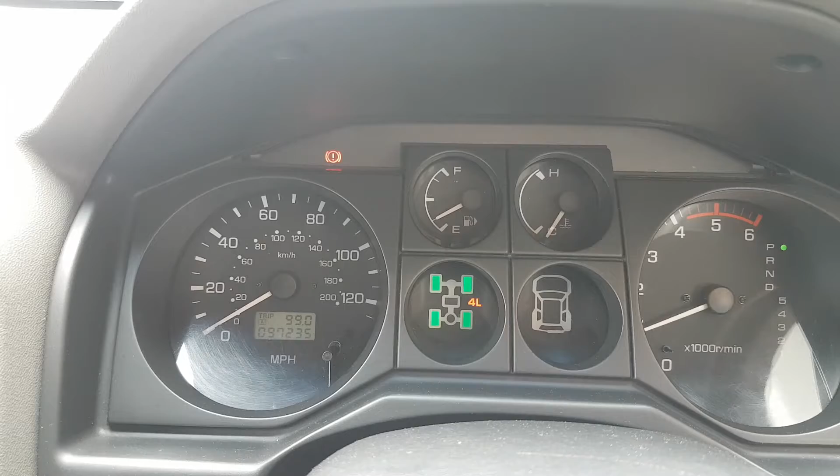I'm not sure, we're going to start the car now. So there's no lights, or at least no lights because they've been covered. Those lights at the front, those wheels, are flashing - I believe it's because they're not engaged, obviously we're in rear wheels only. So that's fine, but look what happens as soon as I try to change this.

It flashes like that, and then everything goes off. At this moment in time, we should have the 4 tires, the 4 wheels, showing green as far as I'm aware. And if I come back now to rear wheel drive, nothing happens, as you've seen. So it faulted straight away. And if I try any other position, nothing works.

Okay, so I think if I restart now, let me see what it does. If I restart, let me see what it does. So that's the checks, obviously. Okay, so rear wheels only. Let's move to 4-wheel, 4H, and it does that. Okay, so this is the problem.

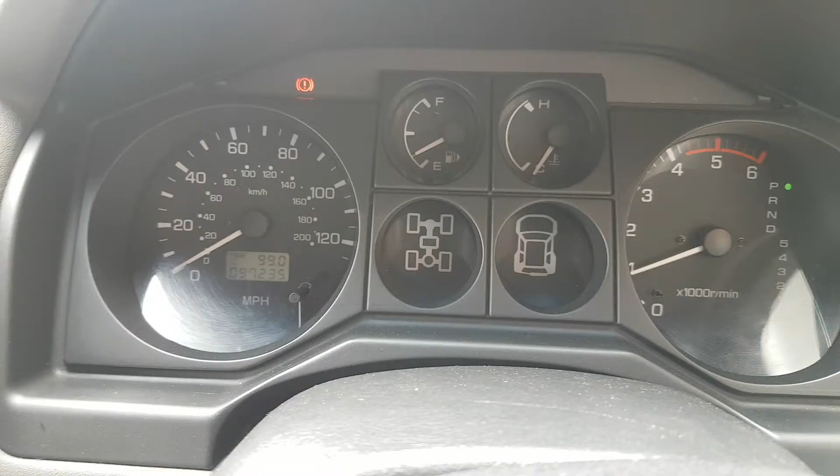Someone scanned this car before. Don't know if it was the same person that covered those lights. Either way, we're gonna scan the car and see what we can find out.

So this car has the OBD16 and that Mitsubishi 14 pin connector, whatever that is. I'm only connected up to 2005, so I'm only connected to the OBD16, so I don't know exactly what I'm gonna be able to do.

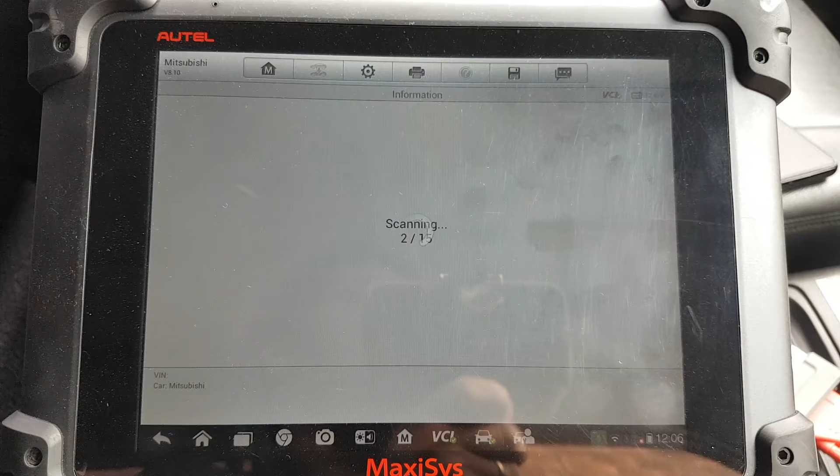To start with, let's go to the ABS, see if the ABS light goes off. As you've seen, the light behind for the ESP is actually covered up along with the other light. Let's see if it connects.

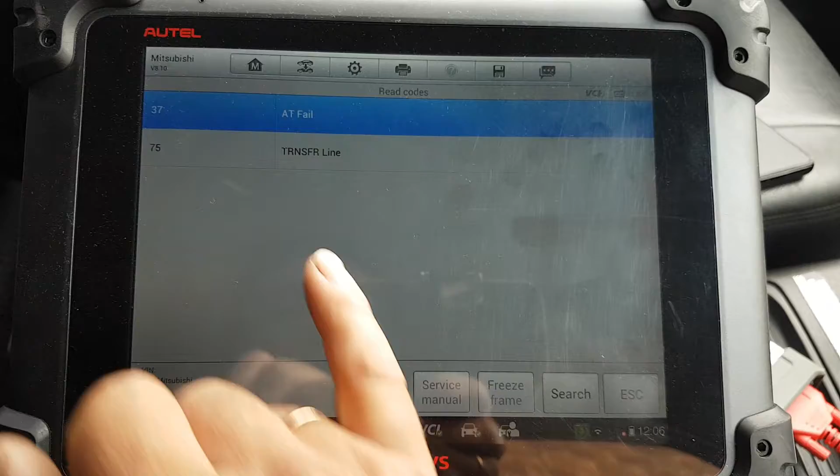Okay, so read codes. Don't know if this is the same module as for the ESP. Should be. So transfer line AT fail, automatic transmission. I believe this is going to be all related, to be honest, and most likely why the ESP light is on, because if the transmission isn't working the way it should, the ESP won't be able to work correctly.

Automatic transmission, but I think we have what is called, let me see if we have any faults on the brakes, HBB. These are quite common to fail. I have a video on that.

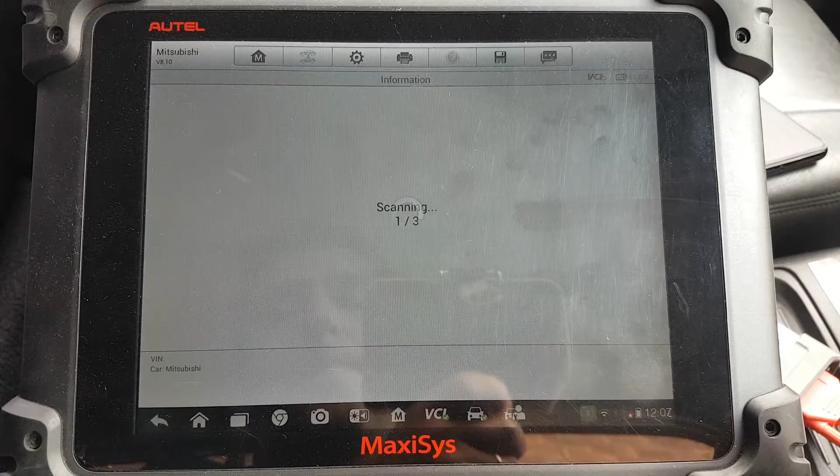Okay, so same faults. Most likely it's actually the same module, to be honest. The ABS or the HBB is going to connect to the same module.

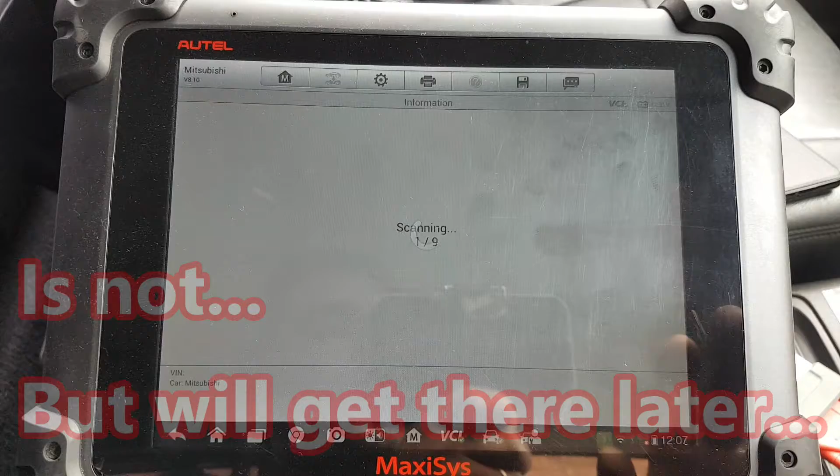So I think it's going to be here. This is my automatic transmission, which hopefully will be the module that controls the 4-wheel drive system as well, or the transfer case. I believe that's where all the engagement for the 4-wheel drive is. It's going to be there. Read codes, and we have what? No fault codes.

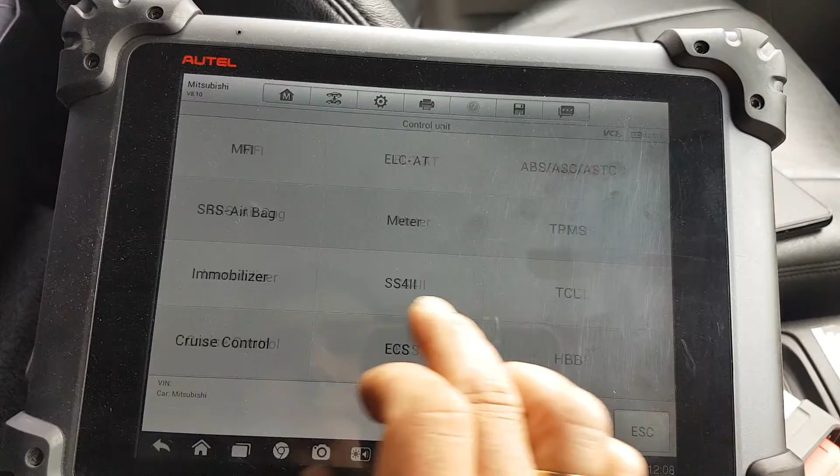Okay. All these acronyms are bloody hell. Display steering angle. Will be TCL, transmission control, maybe.

Yeah, guys, I should have done the research and known exactly where to connect. I do apologize for that, but surely we'll get there. Just hold on. Okay, I got to this module here. I'll show you in a minute. It's SS4II, I think it is.

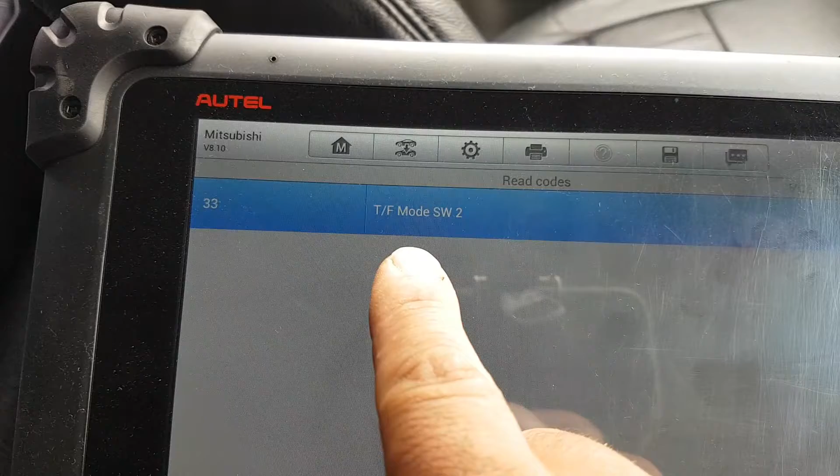TF mode SW2, well that means transfer mode switch 2, maybe? Don't know, I don't have a lot of info. Let me go to live active tests, if there's anything here. So, okay.

Oh, it is actually, look at that. So FW, custom list, 4LL switch, okay, so 2.

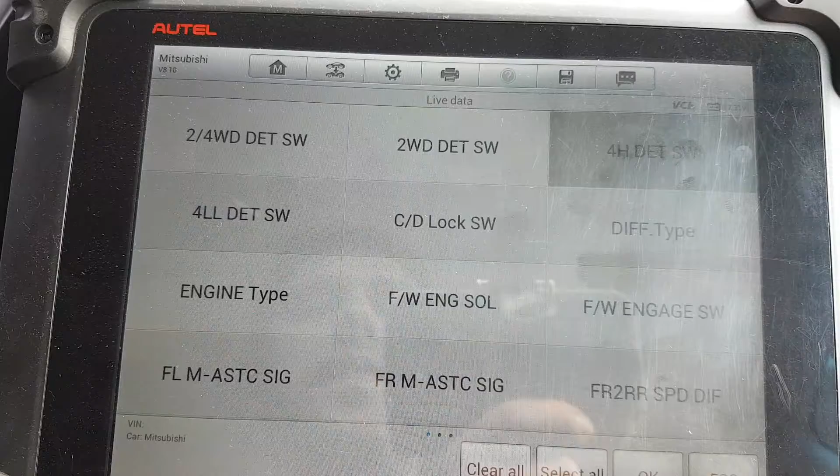That was the one that was failing, so let's do okay. Okay, so on for 2-wheel drive, yeah, that's correct. So if I do test that one...

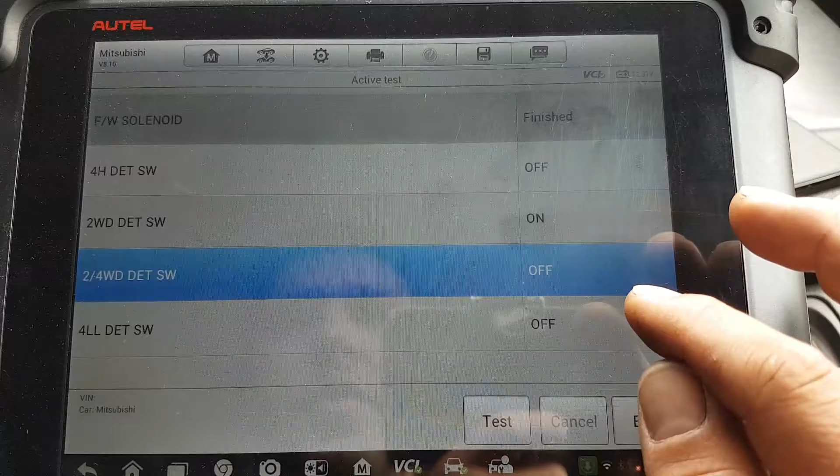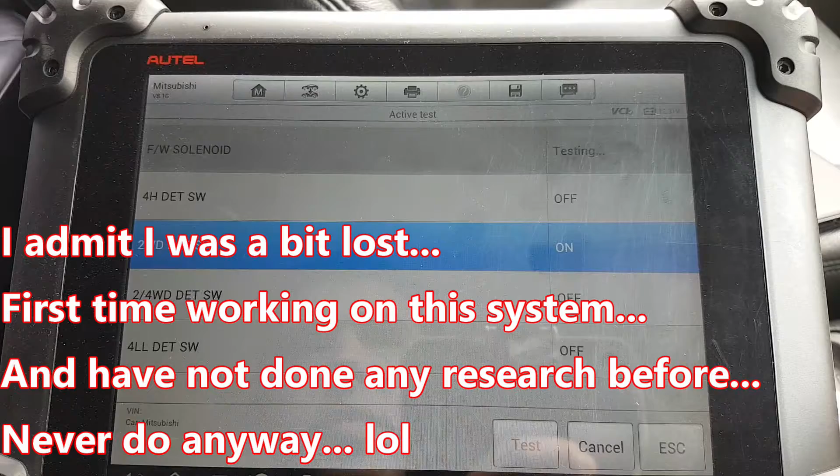I heard some noise in there. Another noise, finished, but that never came on. Let me try the 2 to 4 wheel. What is that supposed to mean then? I can hear noise on every single one. Definitely. Yep, I've heard some noise. Okay, so I can definitely hear some noise on all of them.

Now, shift normal, shift normal. Guys, I don't know what I'm looking at, honestly. But should that 4H come on when I actually switch over?

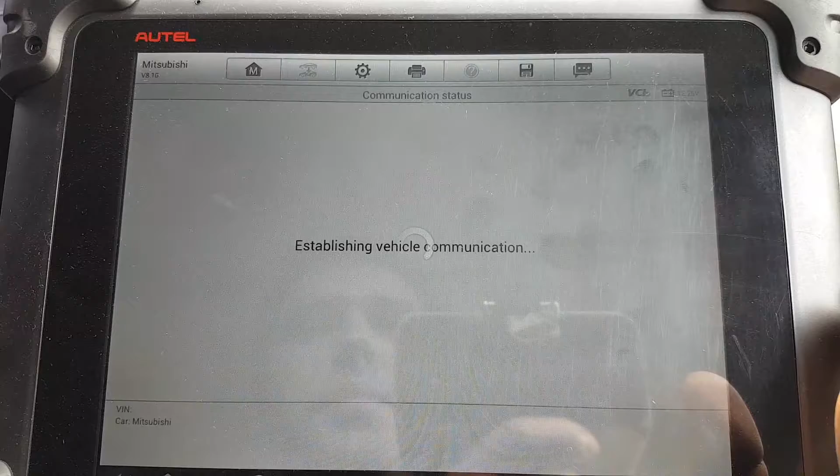Okay, let's start the engine now. Okay, so that's on. So when I go 4H in there, that should come on, and that should stay on or go off, I'm not sure.

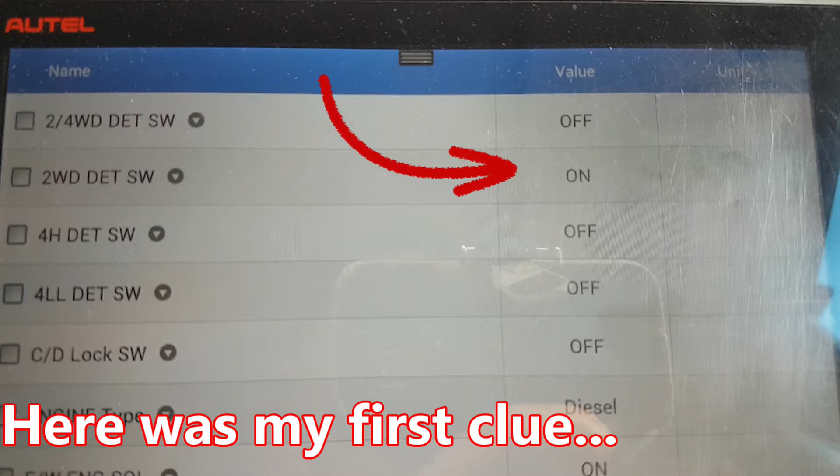Let me go. Okay, nothing changed. Still the same. 4HLC the same. Everything is the same, most likely because there is a fault.

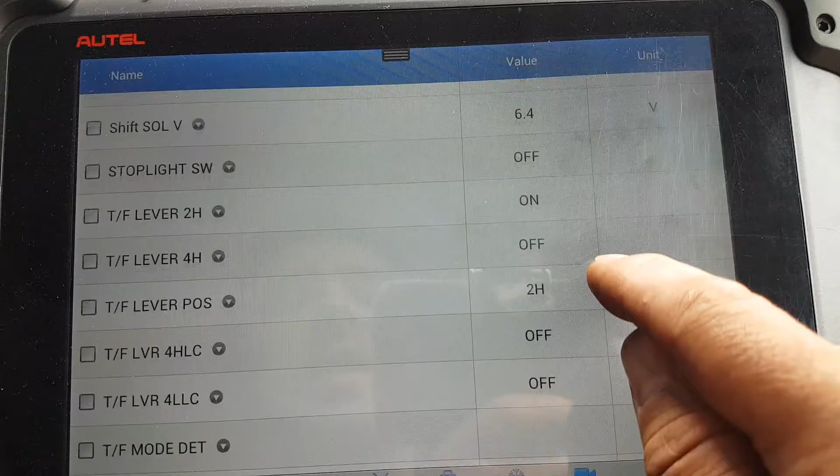Okay. Shift solenoid, lever, okay so this is for the lever position. So let's see if my lever is actually requesting, but I'm sure it is. So it's requesting 2H.

Okay, so on for 2H and lever position 2H. So let's move into the next position. There we go. So all this is working fine here. So the lever is actually requesting the correct positions.

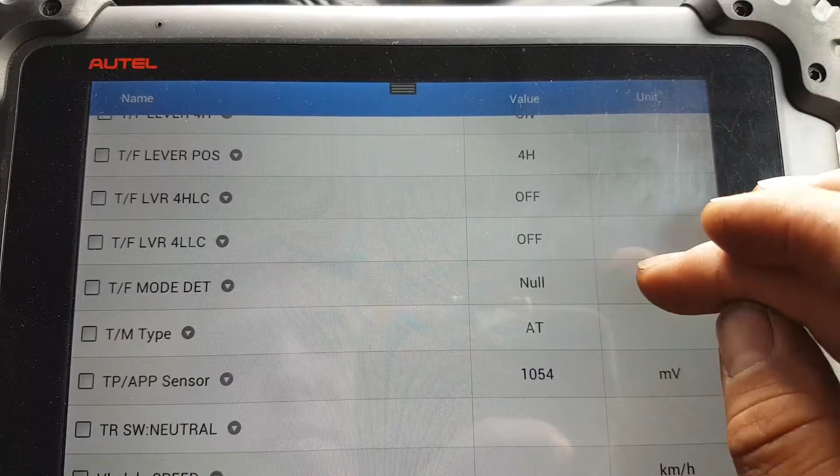Is it actually the gearbox, or I would say the transfer case, whatever, that is actually not switching. Okay.

I think where to start. I don't even know where the solenoids are going to be. Are they going to be inside the transfer case? I don't know. I think the first thing I'm going to do is possibly try to put these on the ramps to lift the Jeep a little bit. It's already quite high, but so I can crawl underneath and just visually inspect to start with. I think that's the first thing we're going to do.

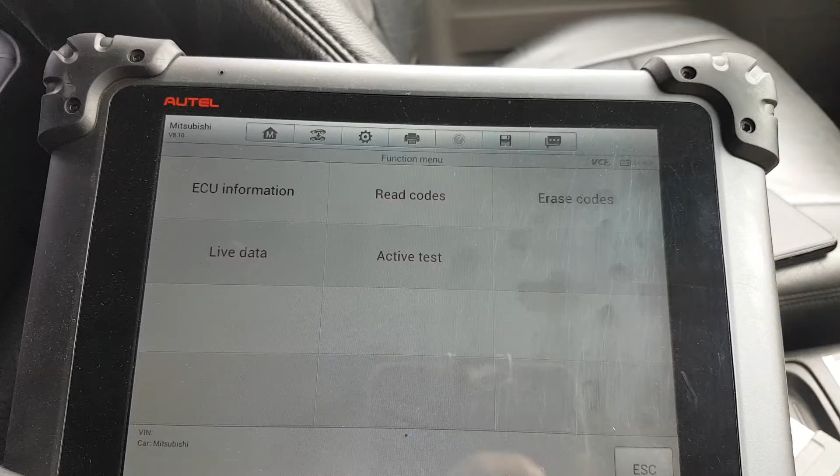You Mitsubishi specialists out there are going to be cringing at me right now if you know exactly where the problem is, or if you know why you're looking through this live data. I think we nailed it for the position there, and I'm pretty sure the other solenoids are going to be the ones that change the gearbox itself. So the request is okay because we've seen on the live data the lever is requesting the right mode. It's just the transfer case or gearbox, I think it's going to be the transfer case, that is actually not switching.

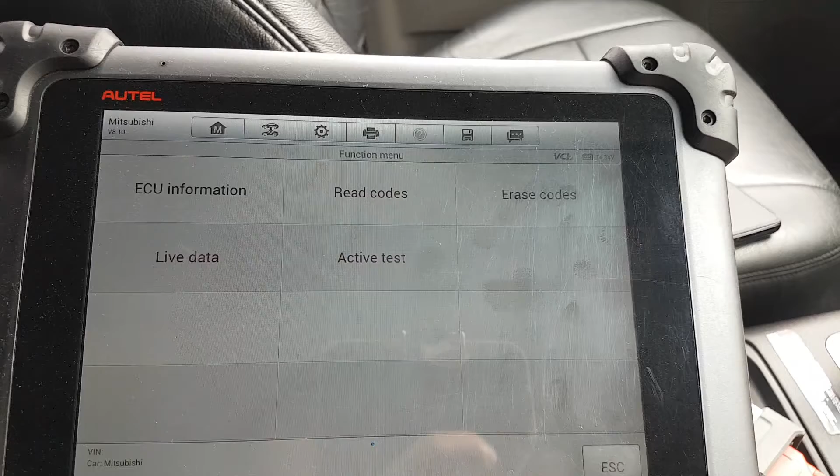So let's try to get under the car and see what we can find out in there. Okay, got it slightly on the ramps. It should be more than enough for us to crawl underneath and see how this works.

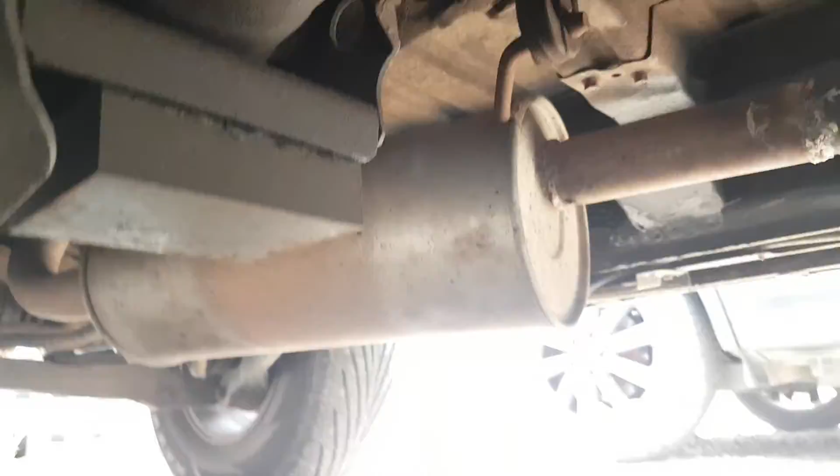Okay, so engine, gearbox, oh voila, transfer case, just as I suspected. So this should come from gearbox, transfer case, to a rear shaft, and then from here we should have the shaft that goes to the front. There we go, there we go.

Oh, straight away. Have I just found it? Look at that. I just got the jackpot. Oh dear, it would be great if this is my problem.

Right. Guys, once again the importance of visual inspection. Look at this, oh dear, spot on. It's actually split completely.

Wow, did I just get the jackpot? Oh dear, look, it has a brand new cut, whatever that is. How could someone not see this?

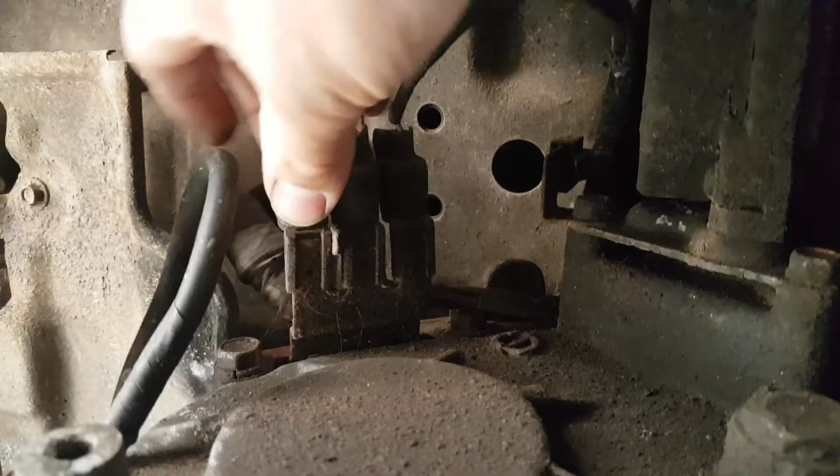Right, I don't think I'm gonna have to take you through too much on this. Let's... oh crap. It's actually cleaned here. We're gonna have to connect these again, check all the other ones. 1, 2, 3. 1, 2, 3.

Will this be what changed my... Oh, it would be lovely if it is, wouldn't it? Okay, I'm quite happy right now. Don't know why, but I am. So let's fix this and see what happens.

And just before we do, I want to show you. I think I know what happens, because look at that one in there as well, a little bit of damage. Can you see there? Possibly not. This is because the outer insulation has been touching there, and it's probably what slowly went through the insulation. This one seems okay, so I think I'm gonna have to repair these two, or at least inspect this one and see if it's still good, and maybe just insulate these or whatever.

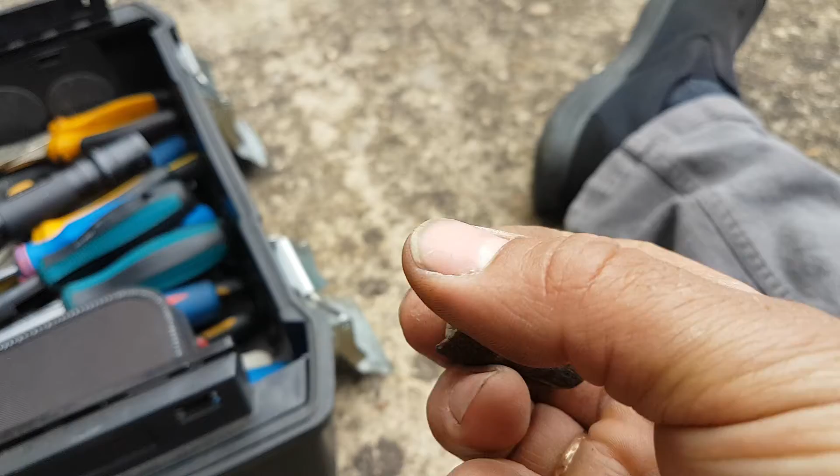Okay, let me fix this and go from there. Okay guys, the chip is there, so because the wire is broken right after the plug, what I'm gonna try to do is dismantle the plug, pull the pin out, and get another wire here which will connect to the other one. So a slightly longer wire, because I won't be able to do anything with this where it's broken. That's the way I'm gonna do it.

And now let's solder this to the loom, and most likely repair the other one as well, and see how it goes. Okay, so this one here is done, ready to put the tube shrinker in place. Just slide it in and heat it up. I'm gonna have to do this one too, because it has already gone through, so the wires inside are gonna start to corrode. Even if I insulate this, I'm not gonna trust it, so we're gonna do the same on this one. This one is the only one, as I said, that is still good, but we'll do the same on this one, and then I'll show you the final result. And there it is, all done.

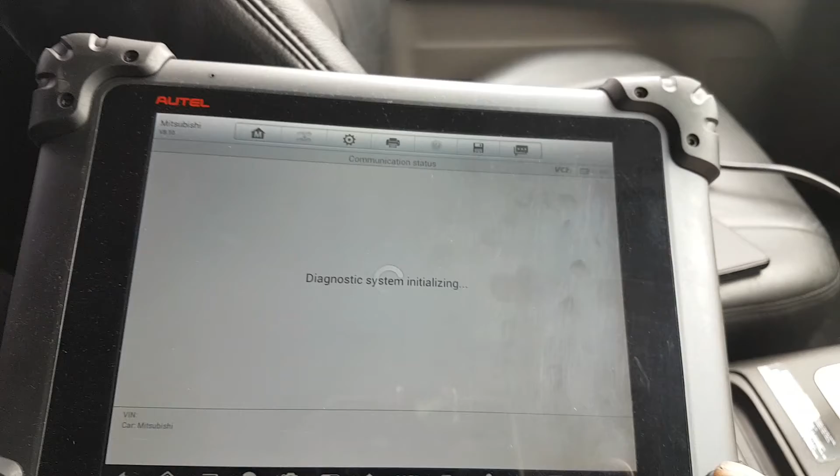Okay, now let's go inside the car and see what we have. The first thing we're going to do is turn the ignition on, and do a full scan. I'm going to do an auto scan and clear any codes. I think that's the most sensible thing to do right now. So we'll do a full scan, let it scan everything, then clear all the codes and go from there.

Okay, scan is finished, found a few faults. We're gonna clear everything and then see if there's anything that comes back.

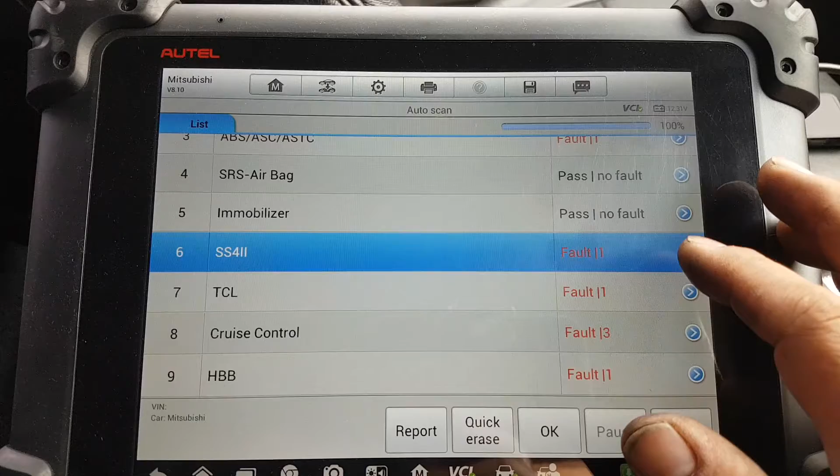After the full erasing, we still have a few faults. On my ABS, for example, I still have some. I've searched what those lights were for. The first one on the left is the ESP fault light, the other is ESP off—if I disable the ESP with that button, that light should come on. The other one just indicates a fault.

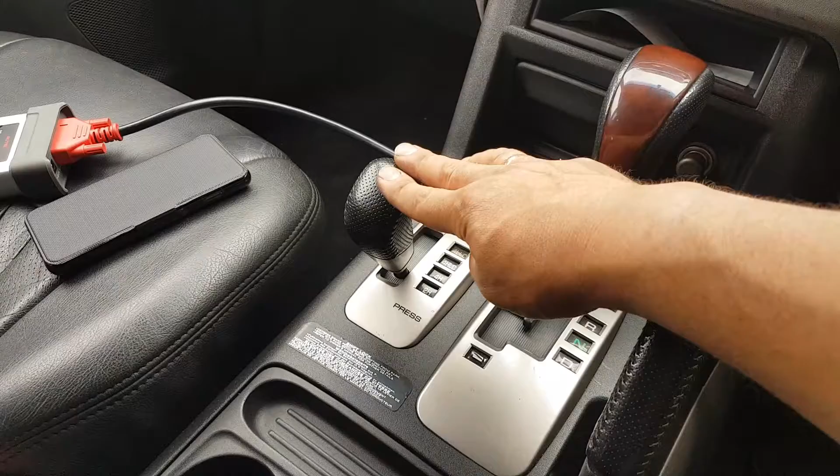So what I want to do now is go quickly through the live data again on the gearbox, which is down in there. I have to wait for the reading codes.

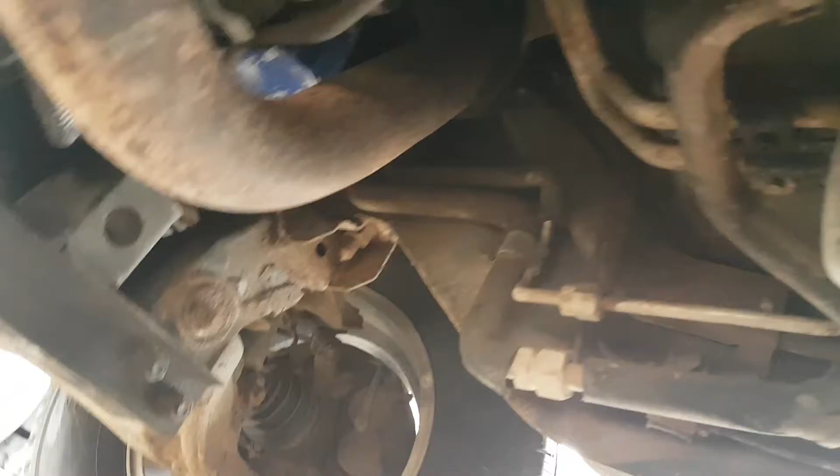As I was checking underneath again—where did I put the torch—I found another issue. I don't know if it's related, but as usual, the cars I get have been worked on by bloody idiots. I wanted to look at this.

Okay, so if you look there, see there? Keep an eye on that right here. Look, it's disconnected. The loom is not in its place, etc. Bloody hell. I don't know if I'm going to find anything else.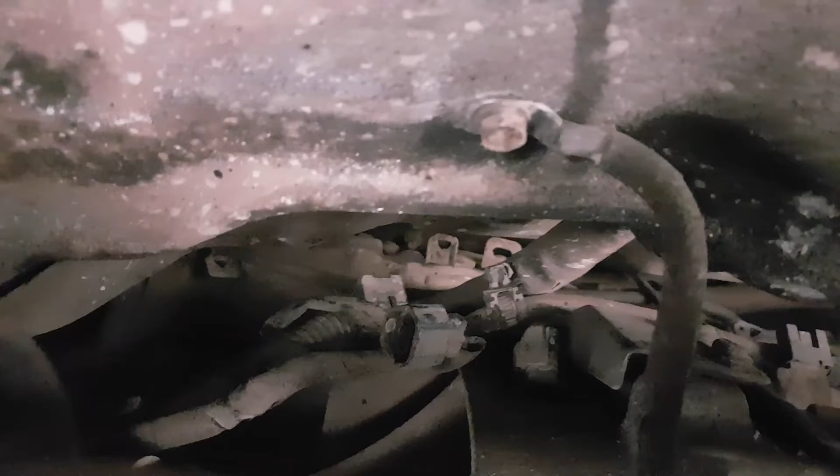So let's plug all this back in, put everything back on properly, and see if this was my issue. It's not 100% in place—there's two brackets I can't get in place, there's really no room, but I'll try later with some screwdrivers. For now, everything's plugged in, let's see what happens.

Okay. Oh dear, that was bad. Okay, I might need to... Still no good. Let me see what faults we have now.

Bloody hell, looking at that it won't surprise me if other wires have been damaged, or something's still unplugged at the back. I just don't know. Let's scan these again and see what we have now.

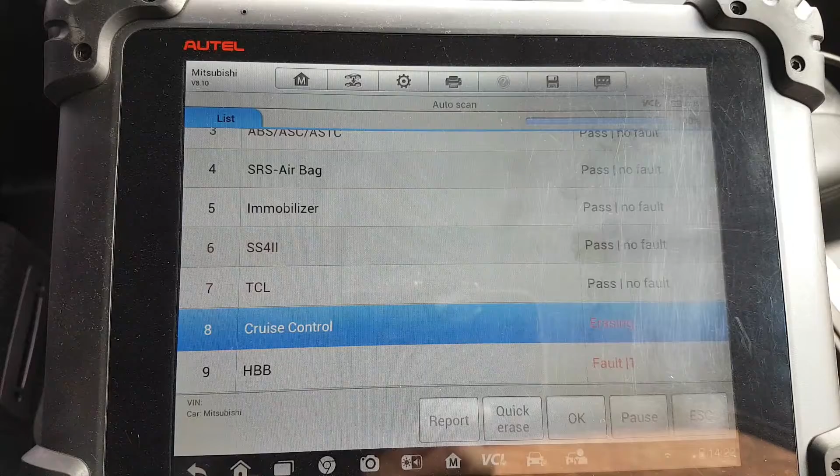So far it's looking good. I read the entire car, cleared all the faults again, and at the moment every single module is coming out with no faults. By the way, most of the faults on this cruise control—there we go, spoke too soon. But as I was saying, most of the faults on all these modules were the same: the 75 transfer line and the 80C fault. At the moment everything is gone. I have my lights there now, so I think I'm going to turn the ignition off.

Now we just have an issue with the cruise control. Okay, let's start it and see what we get now. Strange enough, there's nothing coming out in there—I was under the impression it should bring up two lights. Let's try engaging like that.

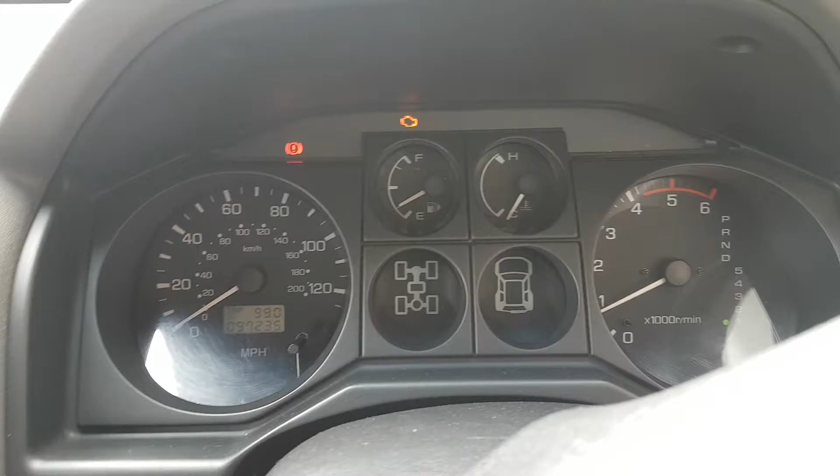Okay. Oops, so it's still something not right.

So what was that sensor at the top then, whatever that was. It should be in two-wheel drive right now, and it's not coming up. So let's rescan the car and see if we have any faults.

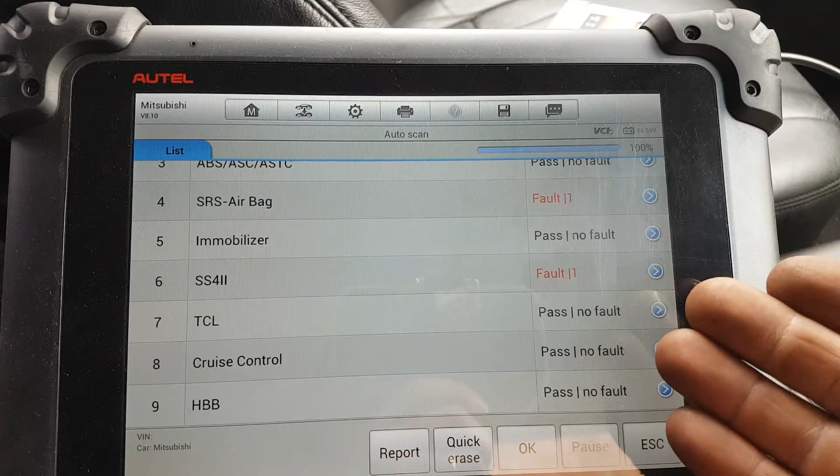It's really weird because I've not even deleted the faults—I just went back. As you've seen, there were faults for the cruise control. I got out, auto-scanned the car again, and now there's no fault for that, but I have these faults here: airbag—I don't know why we have an airbag fault if I have no airbag light, I don't even know if the airbag light is working, I think it is. We're left with one fault on the MFI, which I believe is the engine, and one on this SS4II, which I believe is the transfer case. Let's scan this and see what we have here now.

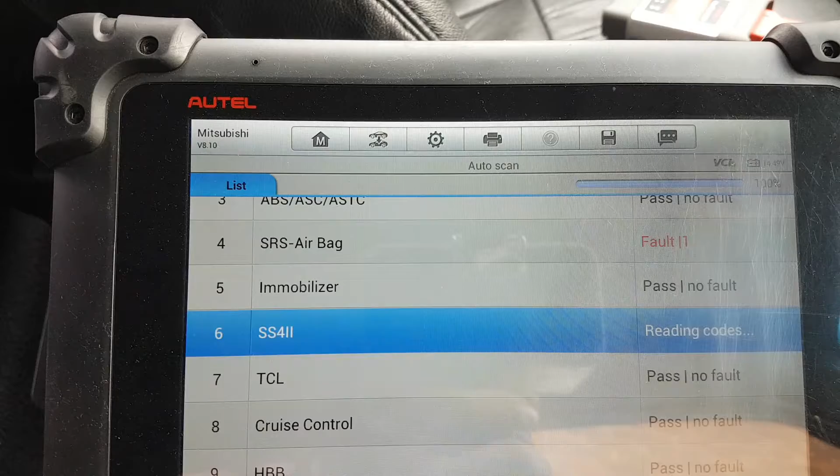Do we still have that? No—TF mode switch 2. So we don't have that transfer line fault anymore. Probably that's why it was: got switch 2, transfer case switch 2. Let me go finish that. TF switch 2, okay.

Let's go just see what we have on the engine. Seriously, all the cables, all the loom is not routed properly, everything is a mess, unplugged as you've seen, broken wires. Oh gosh.

On the engine we have EGR Position Sensor—it's a completely different thing now. What the heck's going on here? Okay, so I think I found the issue this time, well, another issue I'd say. Right here at the back, there is a sensor which I believe is the sensor.

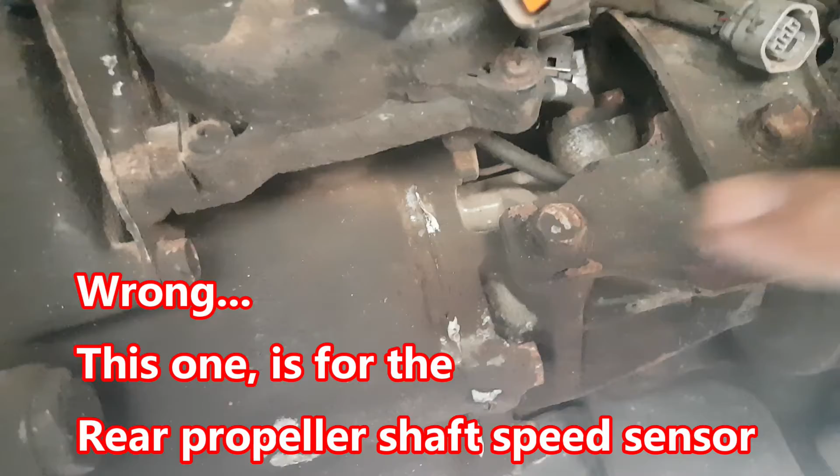Now, this is the plug for it. You can see it's been a little bit battered in there. But the worst is, I removed the sensor, and the sensor is actually broken. Not the sensor, but this bit here, where the plug holds.

Let me see how I'm going to do this. Now, when I plug this in, like that.

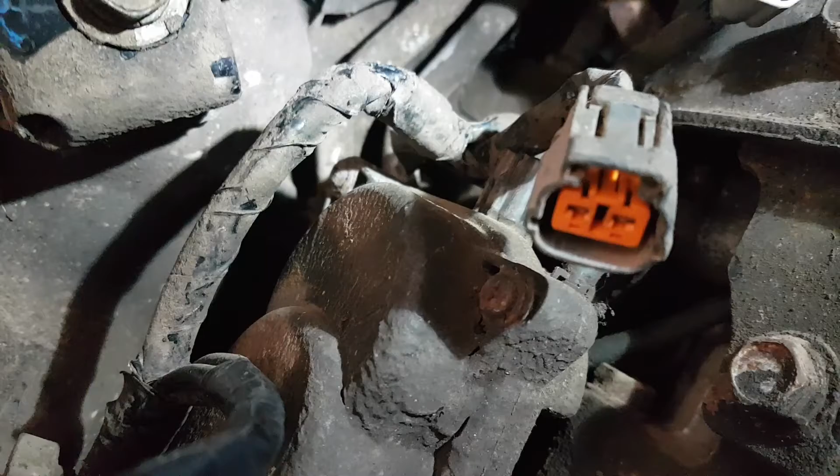Okay, and I do apologize because I had to take a 3-hour break. I've been helping a friend who came around to change some suspension arms on an Audi A7, 2013 I think. It's the one with the bushes on the chassis side, filled with oil, and one was ripped and lost all the oil.

Anyway, as I was trying to show you earlier, this is broken as I've shown you. So if I push this back in there, when I take my hand off, can you see it coming back? And obviously with vibrations etc, it just comes out quite easily. So I think this is one of the issues as well. It's failing here, so unless I get a new sensor, I'm not sure how I'm going to hold this in place.

Let me think. I don't even know where I stopped last time. Just late nights, I'm a little bit tired, but I really want to get this done.

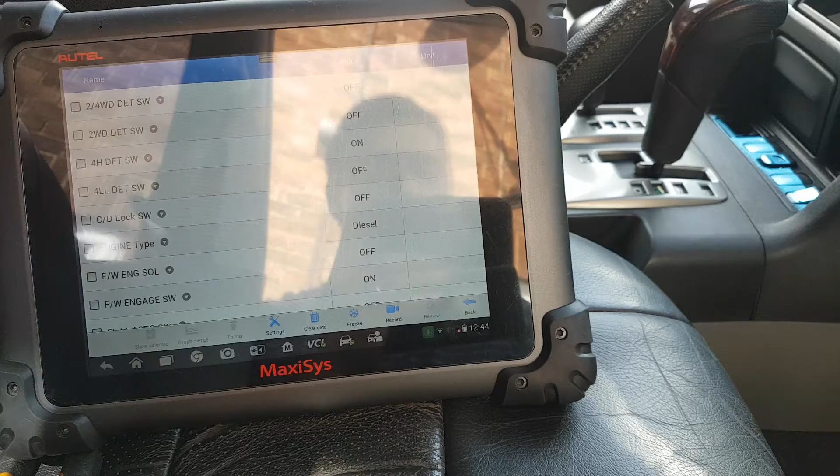So the more I dig into this, oh dear, there's hoses disconnected in there that look like breather hoses, and oh my god, who's been working on this Jeep? I don't even... anyway, I think I mentioned earlier, and I just literally finished managing to get the gearbox.

Let me actually jump in. I managed to get the gearbox all the way to 4LLC, and it worked fine from the 2 all the way forward. Now on the way back, it failed.

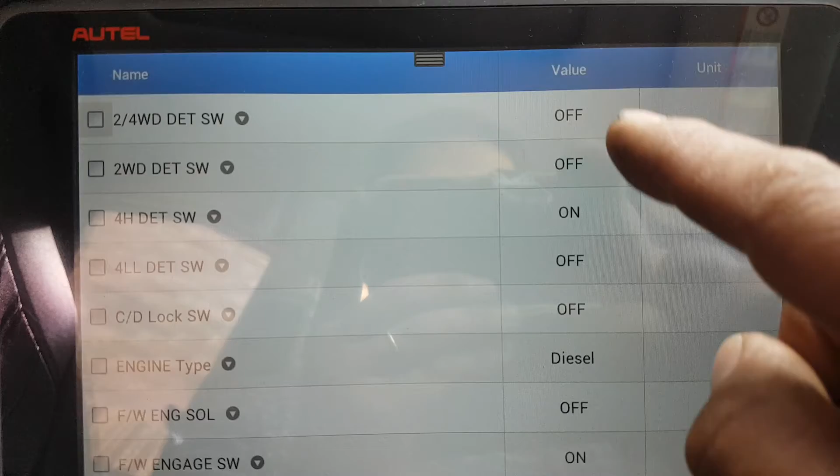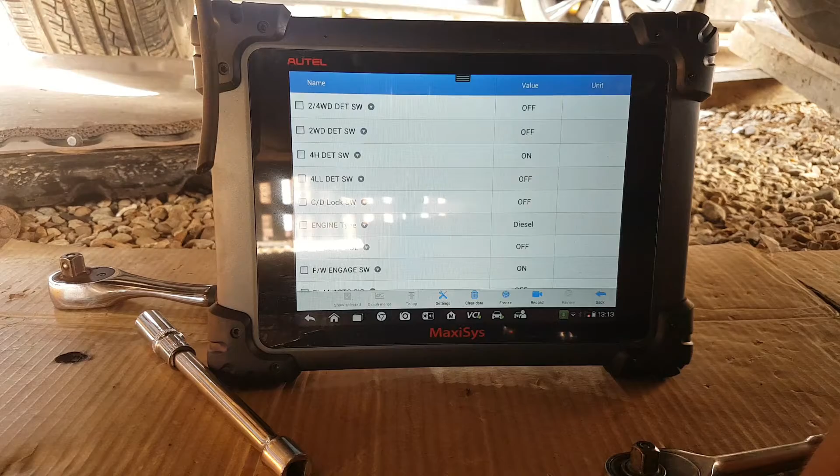And that's exactly what we're going to look at, so I'm going to pull this switch off and have a look at them. Okay, and I think I nailed the problem. Right, let me show you this. So right now the sensor that goes to the 2W/4W detector switch is disconnected. The switch has been removed, it's here in my hand.

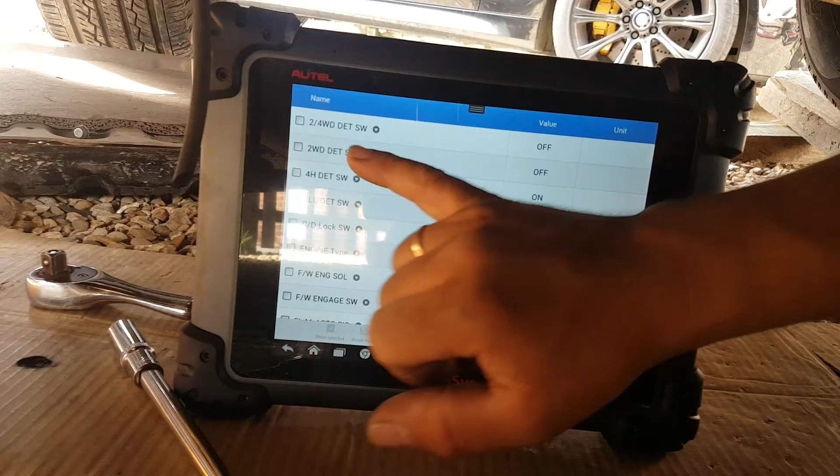What I want to show you is the way this sensor works: it's grounded through the body itself from the sensor, and when it activates it just grounds this signal wire. So what I wanted to look at is the 2W, the 2 and 4W detecting switch. I have my test probe here connected to ground, and I'm just going to ground the plug that goes inside the car, into the module. Let me put the camera first so you can see it.

So I'm going to ground it, and you're going to see it go to on. Oh, come on... there, you can see that goes to on. Now if I take the ground off, it goes off. Now if I put it on, it goes on. It's a little bit slow, but... off. Okay, so you can see the integrity from here to upstairs, up to the module, is okay.

Now look what happens when I connect the sensor. Let me connect this sensor back in and I will show you. Sensor is connected, and let me ground the sensor with the test light.

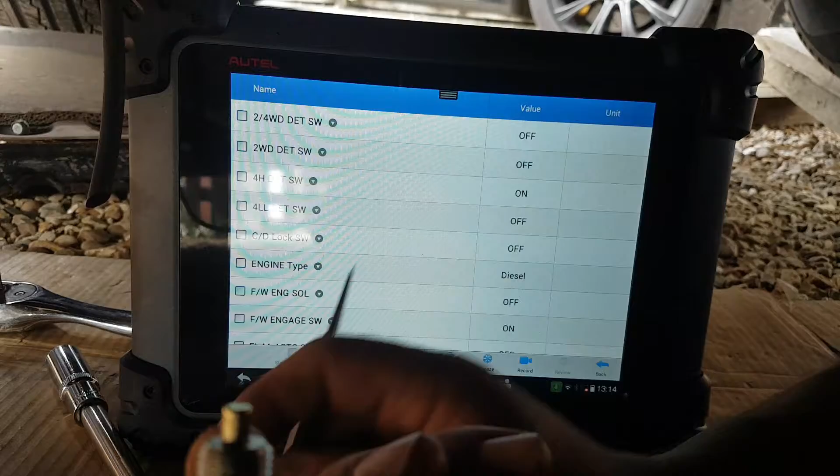Right now it should be showing on, okay, and it's showing off. Right now it should be showing on. So let me see... there we go, you see that? You seen what happened? Now if I push it, it goes off.

Now look what happens if I release it slowly. Let me see if it does it again. Now it worked okay - I've been trying this a couple times, and I think I just managed to get the sensor sort of working. There we go, look at that. You see, I've released the sensor and it's showing off, when it should be showing on right now.

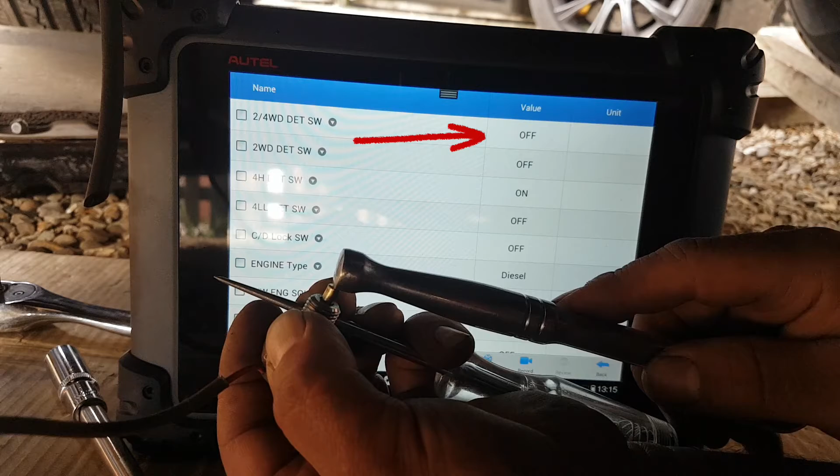So this is my problem. If I do this again, you see, I've just touched it. Look, off, you see? Now let me press again. Off. Off.

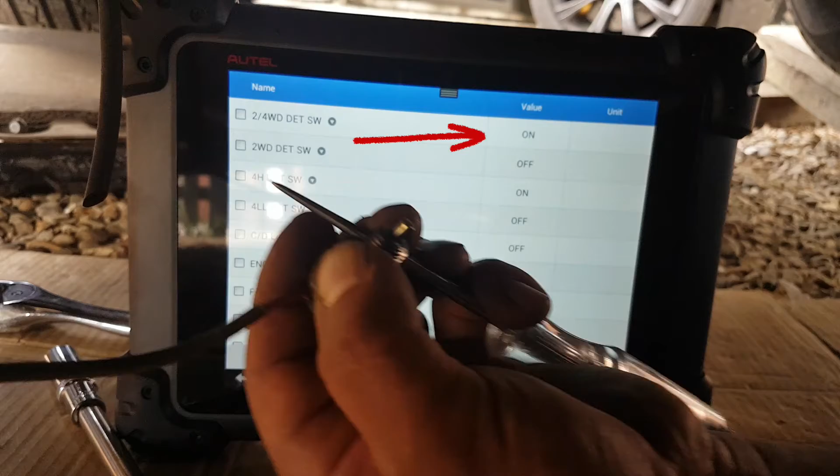You see, that's my problem. This switch here is causing everything. Now I don't know how the other ones are, if they're all good, or if there's another one possibly doing the same thing.

Let me just check and make sure it's not the wire coming to the sensor. I don't think it is. The wire is good, once it's on all the time.

Now if I press it slowly again, or just press a couple of times, sometimes it fails. There we go, failed again. You see?

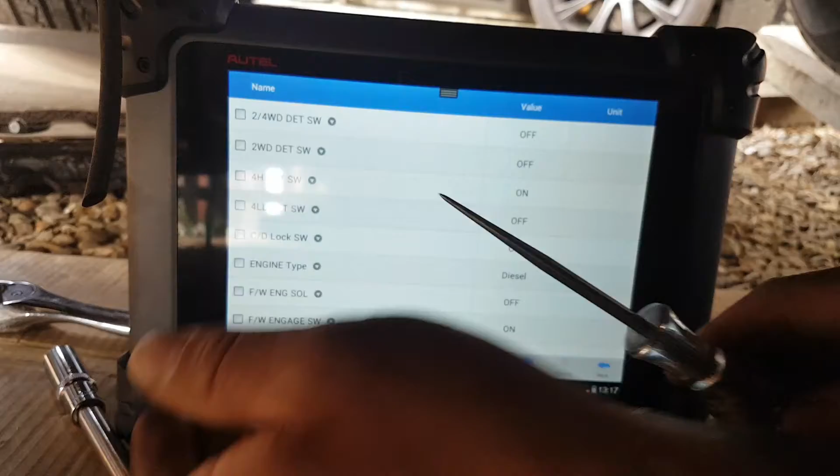Right, there's a few more sensors on this, or switches I would say, five of them in there I think. I'm just gonna, I know we just have a code for one, but I might be keen to replace them all while we're here, while we're through all this hassle - just get them all changed. Probably the best call, I think.

But guys, it took me a little bit to get to this. Now let me show you how I got to this, kind of. Oh dear. Come on, seriously, hold on a second.

Because initially I was thinking it would be the actuator not moving properly, but it's not. Something else. Ah, there we go.

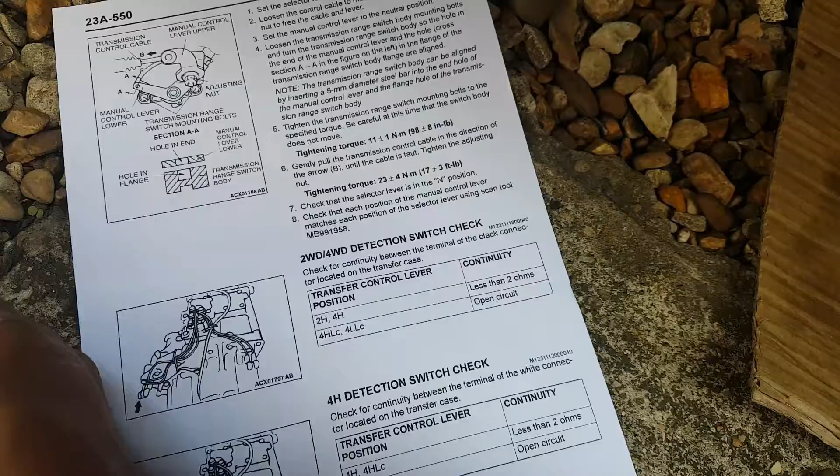It even tells you here how to check this, but which one is this one here? So there we go - in 2H or 4H it should be less than 2 ohms, which is that sensor there, the last one on those three, which is the black one. I think it even says black connector in there. So less than 2 ohms, which means it should be a closed circuit when you go to H.

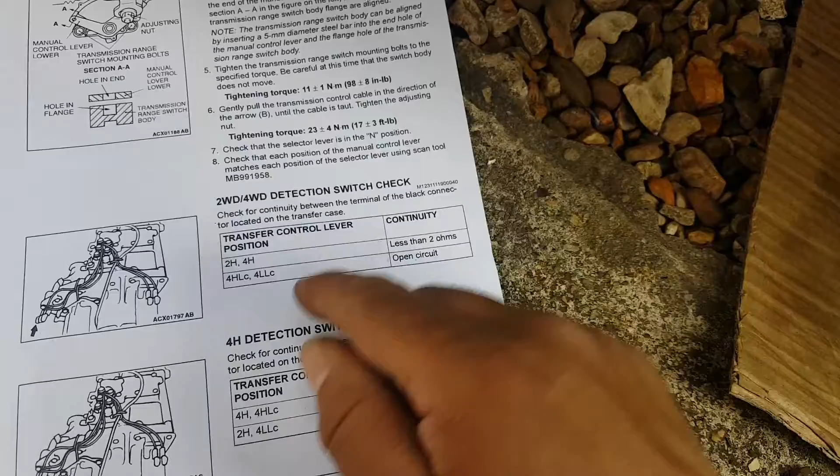And you've seen I brought the gearbox back to 2H, and the gearbox stayed on - it stayed as that switch didn't close the circuit. So yeah, that's my problem. Let's go get some switches and go from there.

Okay, and just bought 5. Now let's work on the next car while we wait for the parts.

Okay, and the parts arrived - this is a few days later. Just been working on the Qashqai. I need to wait for the missus to come back so I can go for a test drive, because the girls are at home and I can't leave them alone, obviously.

And here they are. I'm not going to take you through the whole process of putting them back on, etc. We're just going to take them out and put them back in - we're going to have to follow the coding obviously. They all work the same way, I'm not sure if the cable lengths are different, but we keep everything as per factory - keeping the outside blue matching with the plug, everything correctly.

What I'm using to take these in and out is actually an O2 sensor socket, because of the way they sit on top of that transfer case. So yeah, we're going to put them all back on, and that's about it really.

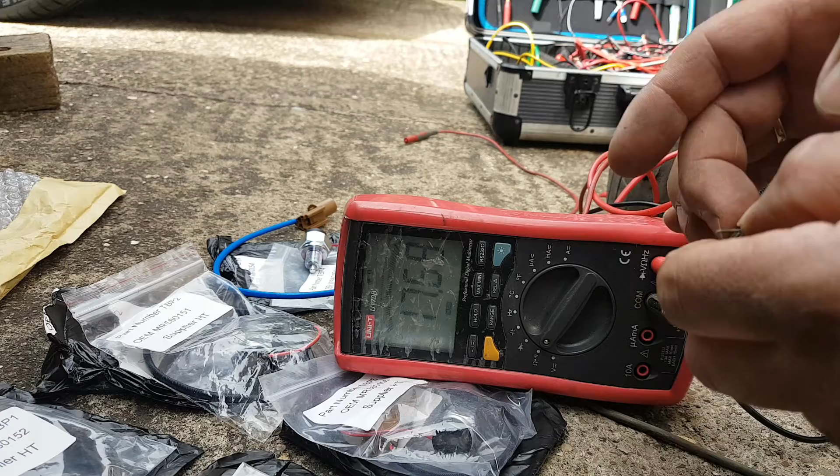Sometimes it gives me some readings - look at that, 17 kilo ohms. Then it goes open line. So this one is not even doing anything. So glad I got all 5.

Let me show you on a good one. So this one is the blue with white plug - no, green, sorry, green with a white plug is this one here. Let me show you what a good one should do.

So it was really a good call that I decided to get all 5. You're gonna see, 2.6 ohms - it actually should be less than that. I think it's just poor contact here maybe. So closed line should be a little bit lower than that, should be close to 0 ohms really.

There it goes, starts to go. Maybe because it's brand new, needs a little bit of use, but still it should give me straight away a closed circuit, but hopefully it will work.

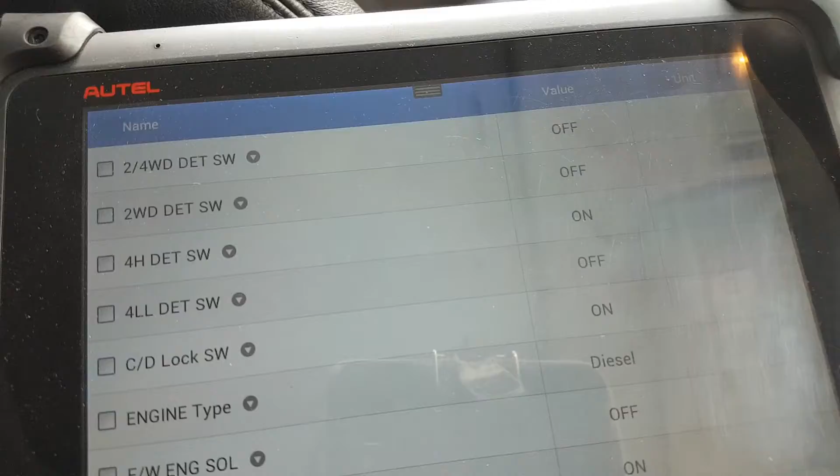But I had to disconnect that switch in there. If I go underneath now, I'll show you. Let me go underneath without stopping recording, so you don't think I'm making this crap up. Oh dear, this is BS. This is absolutely BS. I should have gone with brand new sensors from Mitsubishi, whatever they would cost, and that was it. So I had to disconnect that sensor in there because that sensor was not doing what it's supposed to be doing. So if you look in there, right at the top, you can see though.

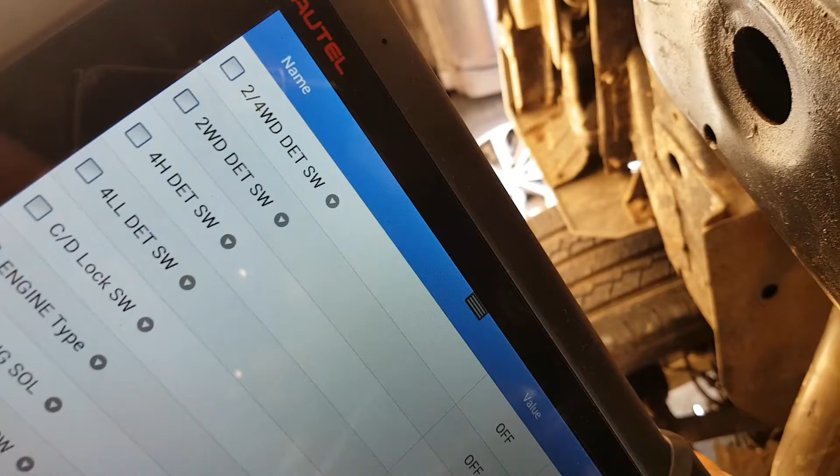So I'm on 4HLc, so the 2 and 4 WD, it should be like that, off. And look what happens when I plug that sensor back in. So I'm going to plug it now. So plug it in, and it goes on, and it should be off. So you've seen that the 4 lights were on. I can guarantee if I go up there now, it's going to show off because it detected the fault when the switch... Oh dear, I just don't want to stop recording, guys, but

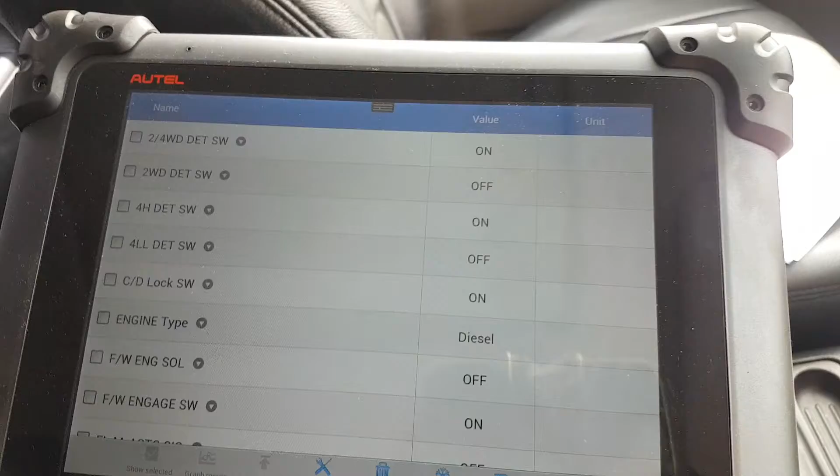it looks like I'm going to have to do all this all over again. So, oh dear. So let me show you what we have now. We have that. Everything goes off because it detects a switch that is on that it shouldn't be on. So basically, I give up with this. Or the guy brings me proper sensors or switch, and I will have another go to replace them. Or that's it, that's the end of the game for me. I'm not going to waste more time with this.

So let's see what the guy decides. Right, and oh dear, kid you not, a few days later I actually have 5 brand new Mitsubishi sensors, including the washers actually. So he actually went and bought the Mitsubishi stuff. And just for comparison, we are going to measure every single one of them. And if you remember what we were getting with the eBay ones, where they didn't make proper contact even before I fit them, we're going to do the same test with the multimeter and see how these ones behave, and hopefully they will inspire more confidence, I would say. Okay, let's test this and see what we have.

Okay, so let's open the first one. Let's see what this one does. They definitely, even pressing this, they feel different. Definitely they feel different. So let's put the clip in there. And we should have, that's about right. Open line.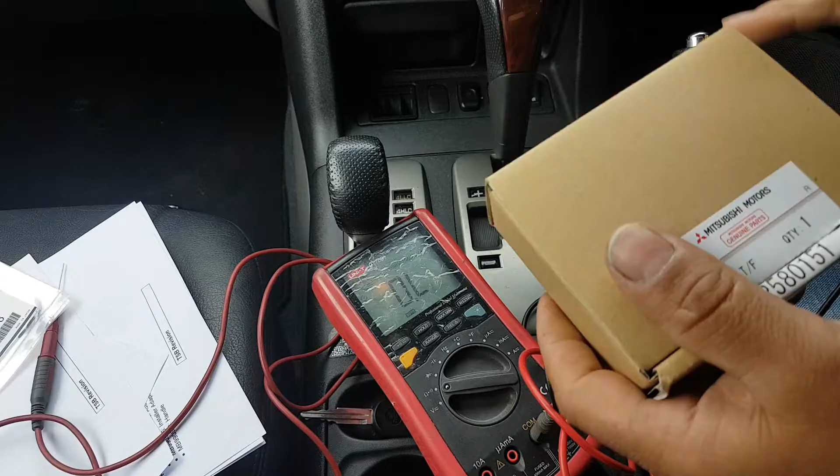They actually should all go below 0.2 ohms. Or below 2 ohms, I would say, sorry. Look at that, 10 ohms. But at least they are not showing what the other ones were showing. If you do remember, the other ones were not even making proper contact sometimes. Let's check another one.

The blue one. Blue with a black plug.

Yeah, he's doing much better than the other ones. Not even doubts.

Let's test another one. There you go. Another one. This one is actually very good. Yeah, spoke too soon, it's just an on-off switch. I don't know why it's so complicated to make this completely close the circuit. Why we have all these ohms going up and down is... Really? This one is actually quite good compared with the other ones, I would say.

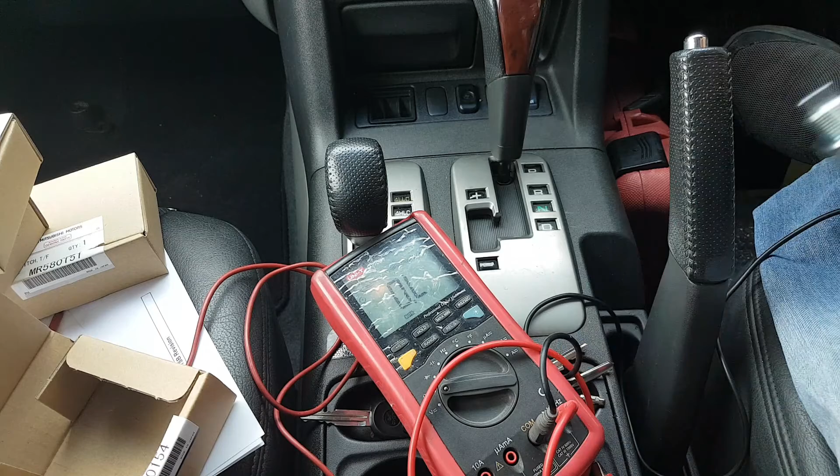Okay, so with no further ado, guys, I'm not going to take you through anything now. I'm just literally going to put these ones, take the other ones, put these ones in, and see what we have afterwards.

Okay, just finished, put everything back on, and we have a fix, at least for this. I still have the ESP light fainted in there. I mean, it's still covered and it's still on, but remember that at this point I need to learn the steering angle sensor, because I had to disconnect the battery the other day, and the only code coming up is error 83, steering adjustment, or something like that. Anyway, as for this, which was the main thing, I just want to show you.

I think I need to come into neutral. So 4H, sometimes you need to drive a little, there we go. You need to kind of get into gear for the gears to engage, I guess. So neutral again. Now I'm going 4HLC, which I thought something else should have changed when you go to 4HLC. It should come up with some lights in there maybe, don't know, unless they've been covered as well. But 4HLC, it just stays the same. And now if I go 4LLC, there we go. Now I'm going to come back 4HLC, 4H, which stays the same, 2H, job done.

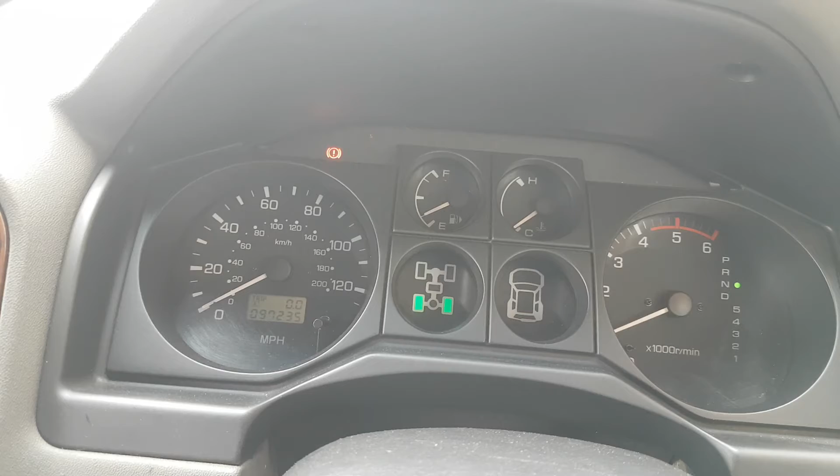I've been trying these back and forths a few times. It's working perfect. I'm gonna take the dashboard out just to make sure they haven't covered any other lights. I strongly believe that's going to be only purely for my steering angle now, and that light should go away as well. But I'm quickly going to take these out and have a look at it. But as for these, looks like we got a fix and it was only the switches. But let's take the dash and have a look at it.

Yes, indeed, the bulb has been removed. This is, I think, for the central differential lock or something like that. There's no bulb on this one. Oh, there is. No, there is. Oh, there isn't. I don't know if there is or not. Anyway, let's get some bulbs for this, if I have them, and get this in place, and then try to get the tape out of the other ones.

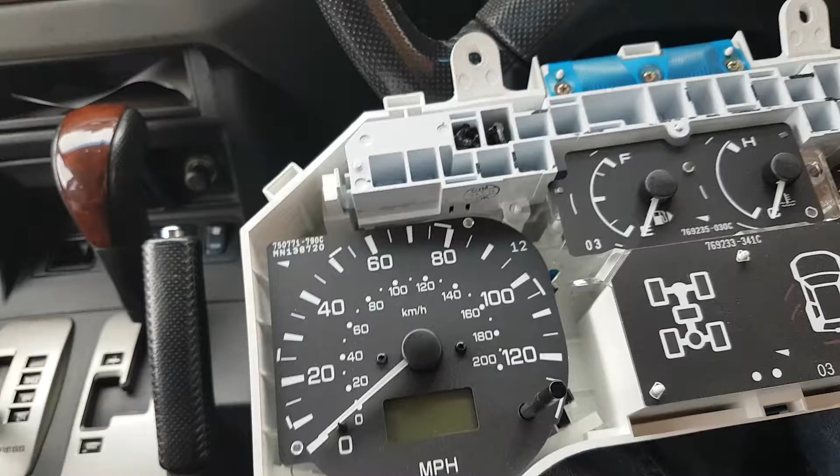Guys, what a bunch of dickheads. Oh man, why do people just not do the job properly? That's it, damn it. Okay, so obviously they covered this up, but it was not tape. It was with this sort of, it looks to me like silicone or some crap like that.

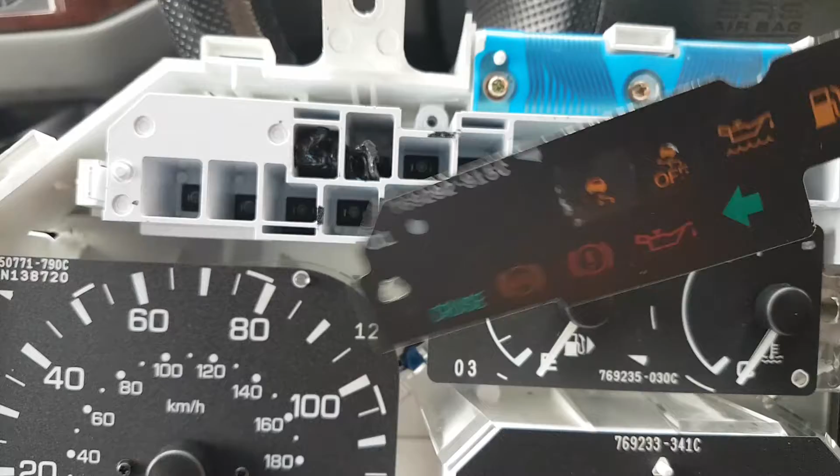So on this side, as you can see, you can read in there SRS. But this one, as I was pulling it out, he actually pulled the label off of this. See? This one is not too bad, I think. I might be able to make it show a little bit, but seriously, I think I'm not gonna touch this one, the airbag.

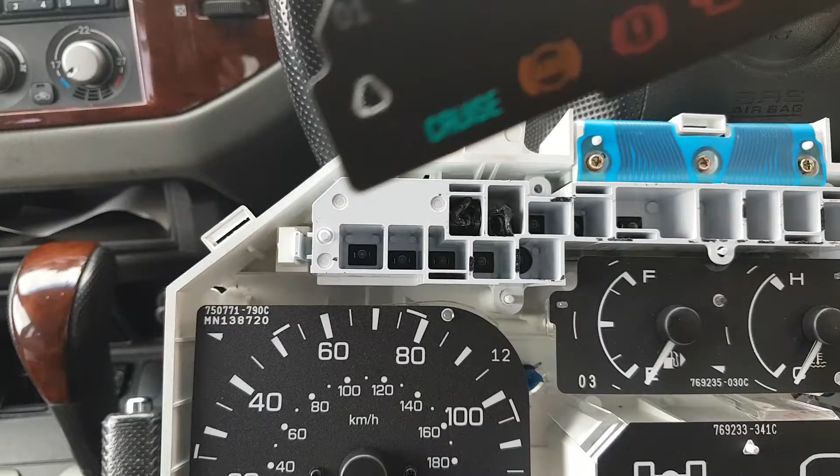I'm gonna leave it as it was. Unfortunately, it's gonna have to stay like that, because it's gonna need either one of these or a new cluster. These ones I might be able to, but still I don't know how it's gonna look in there, because if I try, I don't know how it's gonna look. It's gonna look crap.

Oh, damn it. Can't speak with the owner first to see if he wants a new cluster. Okay, I rang the guy, and he literally told me, come here, I will give you another cluster.

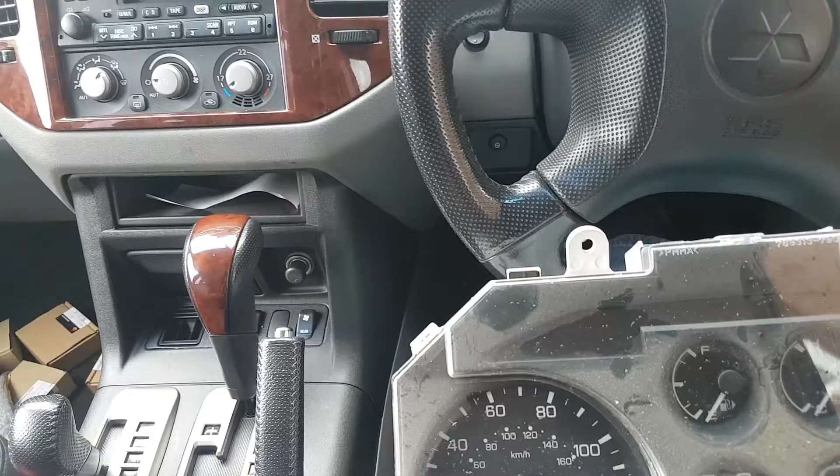So obviously this is another one I'm going to put in. The mileage will be wrong, etc. All I'm going to do is take the bits I need from that one, including the bulbs, etc. That should fix my problem.

Just a quick update. I'm going to replace the wall light assembly, because I have a feeling that when I try to take the glue out, something's going to smash up, and I don't want to risk that. So we're just going to replace this wall light assembly, and that's it.

Okay guys, I can show you. The airbag light is permanently on, it never goes off, it comes up with error 72, and I found this underneath the seat. Don't know if it's related, so we're going to try to fix this first, and then we'll go from there.

Okay, I just came for a drive to get the steering angle sensor to realign, and the car is running beautiful. All good, just let me park at home and I'll take you through the last bits and wrap up the video.

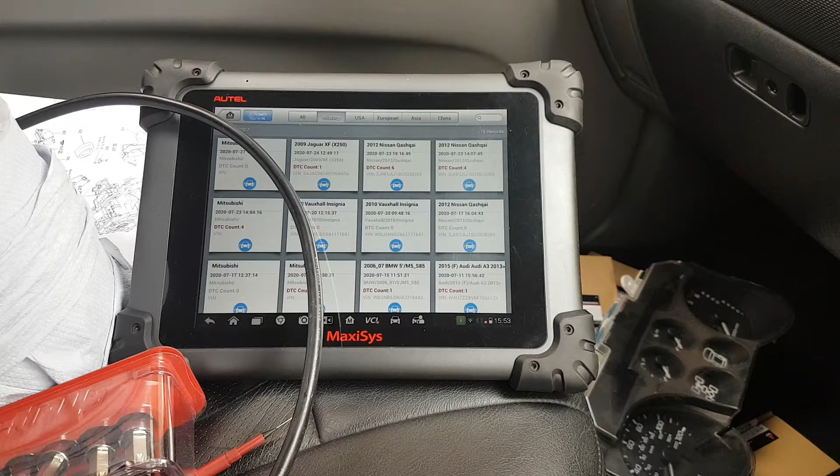Okay, I just finished clearing the codes. Unfortunately I didn't show you that there's no faults anywhere, but for some odd reason on these Mitsubishis, if I leave the scanner plugged in, the engine light is constantly flashing. I don't know if it's because it's assuming there's communication going on, but I wanted to show you there's no faults now and the car is fine. Trust me, there was no fault actually.

Look at that, that's the last scan when I came out, just now at 15:52. So I just came out, and as you can see, after the erasing there were no codes. Now I'm going to start it.

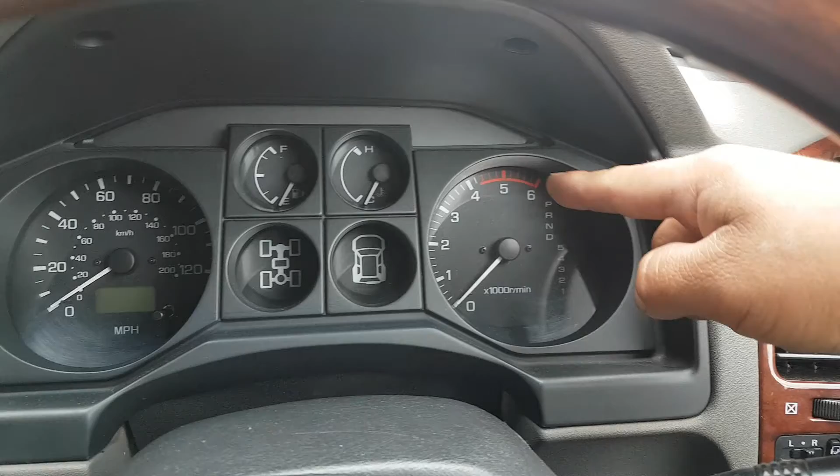So pay attention to all the lights that were covered, including the airbag light and the ESP. So let's start it. So the airbag light goes off, those lights go off. That is now at the moment in 2H.

I'm going to show you that it engages every single one. I think you need to be in neutral to do this. So let's go to 4H. Sometimes you need to make the car move slightly for the gears to engage.

Okay, so 4H. Now remember, from 4H to 4LC nothing would change on the screen, and I was pretty much sure the LC is for the central differential. So you're going to see now when I go to 4LC, there we go, my light for the central differential comes on.

This one at the bottom, guys, I don't think this car is equipped with that. There are bulbs in there - I replaced the bulb, I put a bulb in there, but I don't think this car is equipped. I think that's to lock the differential, but when I look at the rear differential, there's nothing on the outside, no solenoids, no wires going in, nothing. So I don't think this one has that feature, but I'm going to show you now.

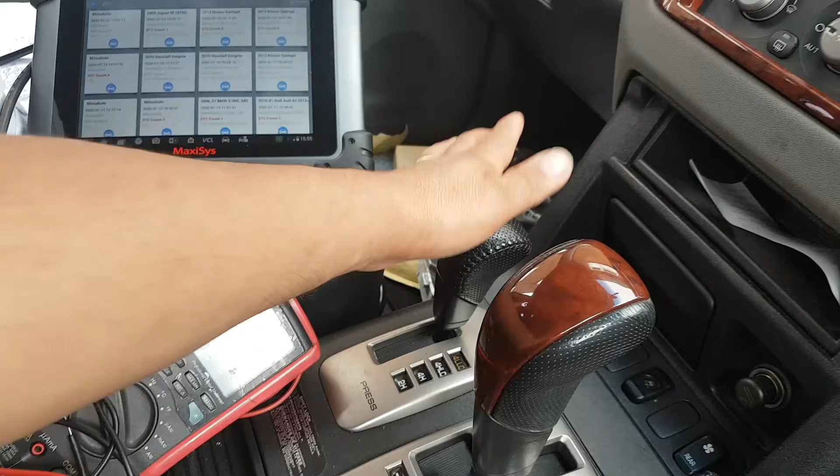We're going to go to 4LC and 4L, there we go. And obviously when you go 4LC, the ESP doesn't work, but it engages everything. Now we're going to go back to 4HLC, there we go, and my ESP turns on again. Now we're going to go to 4H.

There we go, and now 2H. Now with 2H you usually need to move the car. When you go from 2H to 4H, for some reason you always need to jog the car a little bit back or forwards. As you can see, I've done this many times while I was driving - well, not while driving, but on this quick drive I stopped and engaged different modes, etc. Everything is working spot on.

And I hope I don't get another one like this soon, because this one was proper bodged, definitely proper bodged. So the main issue here was the transfer case, as you've seen, the switches, then everything in there, some really good bodged work on that cluster. Whoever covered that - well, not very good, because you could still see the light through - but the airbag, bloody hell, someone was good. Repair the wire? No, let's go and open the cluster and cover the light.

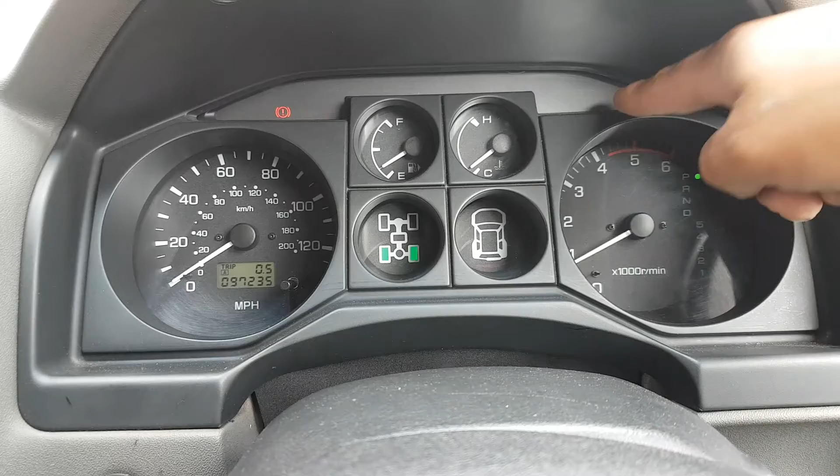Seriously, unbelievable. Guys, I just want to wrap this up. I have this car here, I've had enough of this. You've killed my back getting under this car so many times. I've just had enough of it, I just want this out of here now. So with no further ado, guys, let's go and wrap up this video.